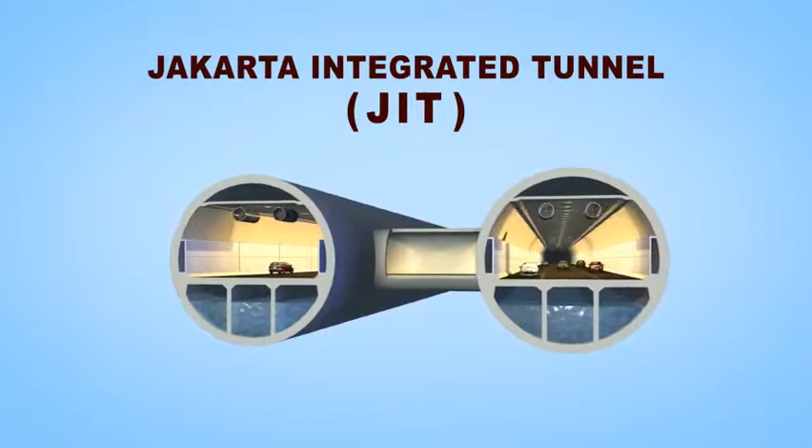Jakarta Integrated Tunnel, a twin or double-barrel tunneling system, presented by PT Antareja Mulia Jaya and supported by the Ministry of Public Works and Housing in cooperation with the provincial government of DKI Jakarta.

Jakarta is the capital city of the Republic of Indonesia with a population of around 10.2 million people in 2011. But the Jakarta metropolitan area, or Jabotabek, has around 28 million people, which is the biggest in Southeast Asia or the second biggest population in the world.

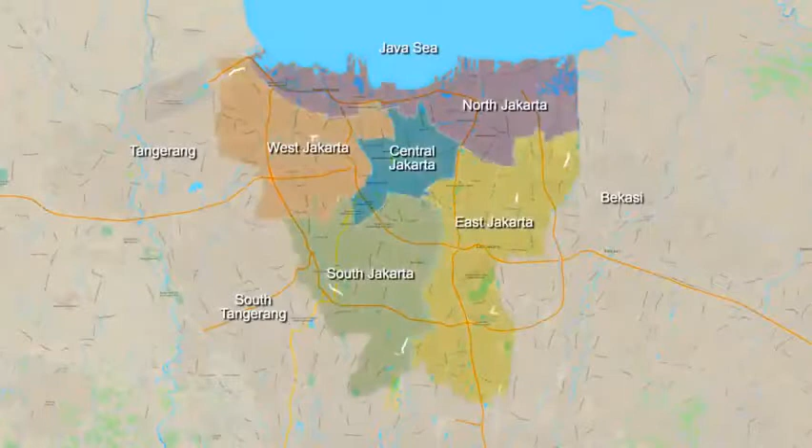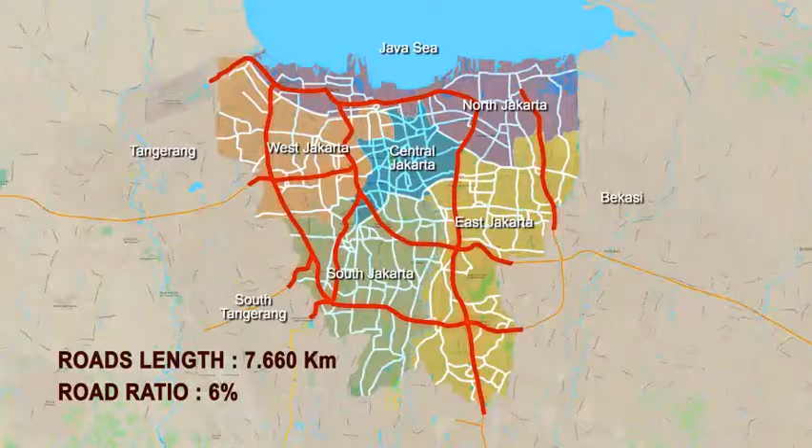Jakarta has only 7,660 kilometers length of roads, covering road areas of around 4,000 hectares. The ratio of roads in Jakarta is only around 6% of the city area. The total amount of motor vehicles in Jakarta is around 9.6 million in August 2014.

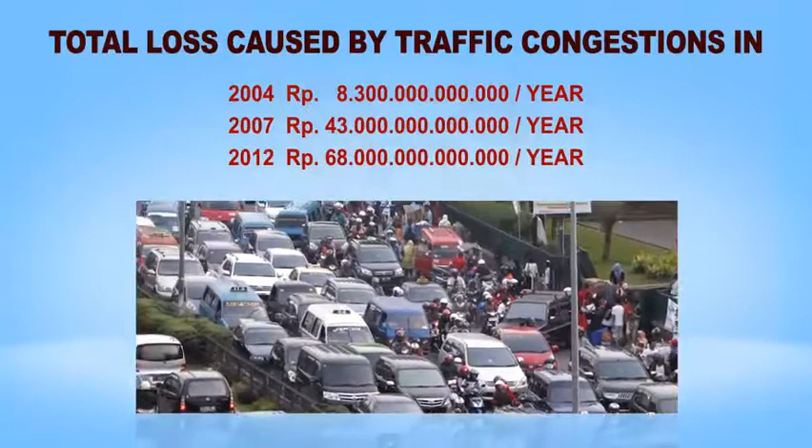These motor vehicles are always increasing rapidly year by year and cause severe traffic congestion in almost the entire city area. The classical problems of Jakarta city are traffic congestion and flooding.

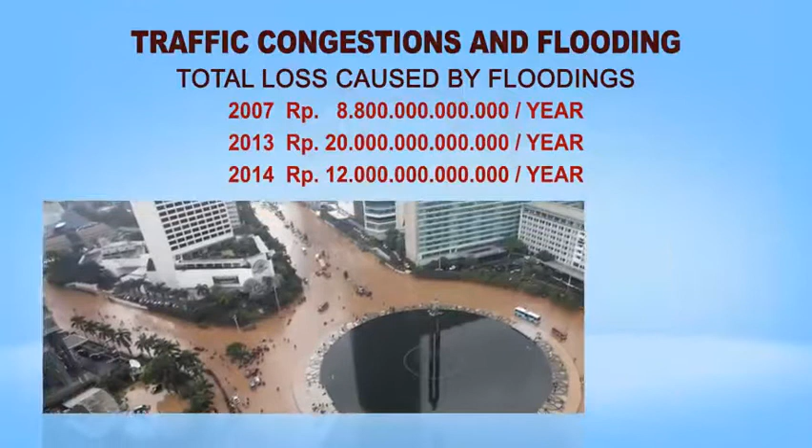The basic concept of flooding management in Jakarta was given by Professor Herman van Breen in 1918, when Jakarta was called Batavia under the Dutch colony. In this concept, Batavia city was entrenched by a flooding channel. In principle, this concept is to limit or restrict rainfall water coming to the city from the upstream area by building a half-circular flooding channel.

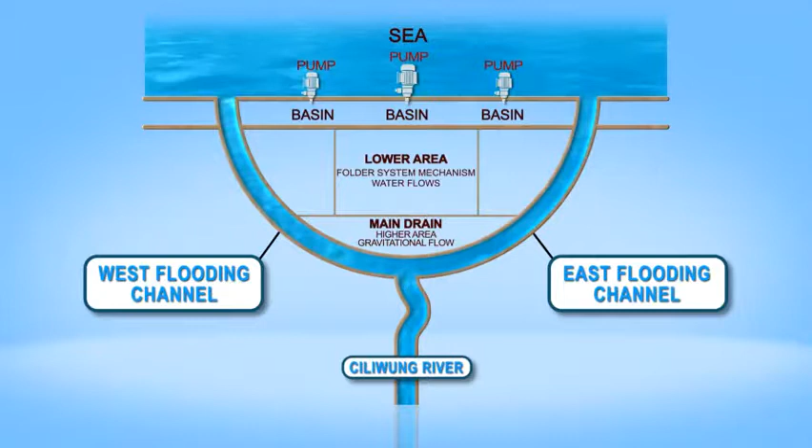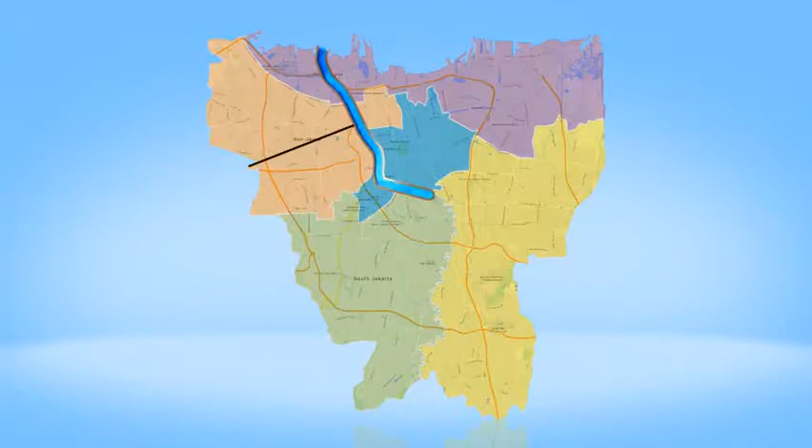Whereas since the volume of rainfall in the city has become less, it can be managed by building several drainage channels inside the city. The Dutch built half of the flooding channel to cover surface water flow from the southwest bound area of the city. This channel is well known as Kanal Banjir Barat, or West Flooding Channel.

Just a few years ago, the provincial government of DKI Jakarta completed this flooding channel by building the other half of the channel in the east direction, that is the East Flooding Channel. However, now a new problem has arisen. The old Batavia has changed and become a bigger city called Jakarta. The flooding channel is not bounding around the city anymore, but is now located in the middle of the city. Therefore, a new model of flooding mitigation is urgently needed at the south bound of this flooding channel.

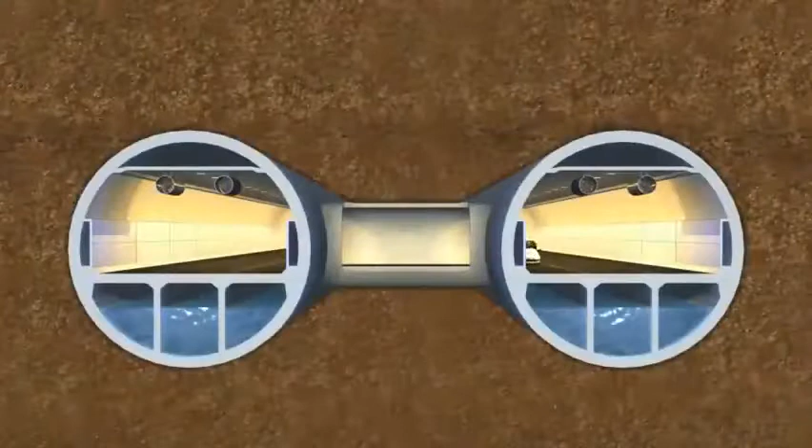The best answer to all of those problems is the Jakarta Integrated Tunnel, or JIT. JIT is a solution to traffic congestion and flooding problems, and at the same time, it can give a solution to the lack of electricity and standard clean water supplies of the city as well.

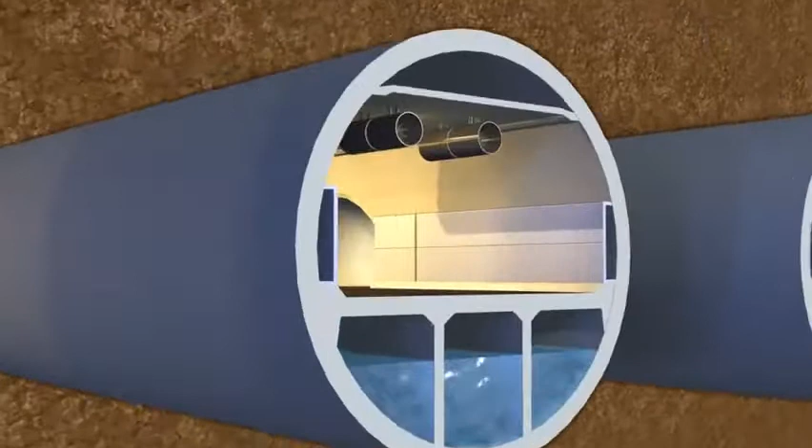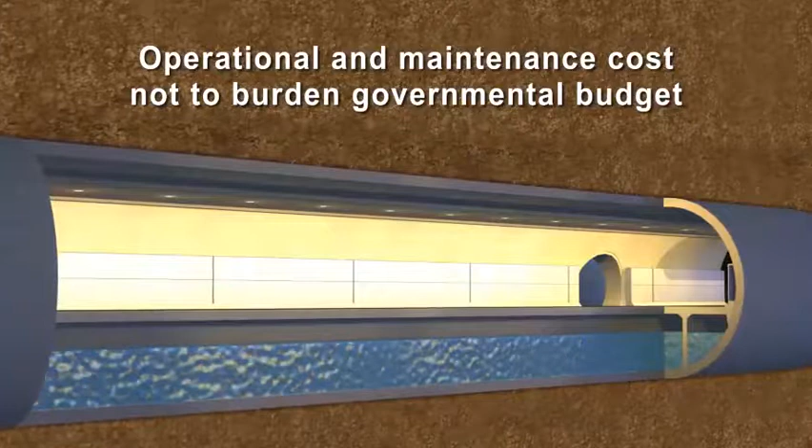Actually, it is an obligation of every government in the world to build and finance a flood controlling system facility, because not even a single private company will step into such a zero return project. In order to overcome this constraint, in the Jakarta Integrated Tunnel concept the flood controlling system is integrated into a toll road system. So the JIT system relatively will not burden the government budget, especially in operation and maintenance of the project.

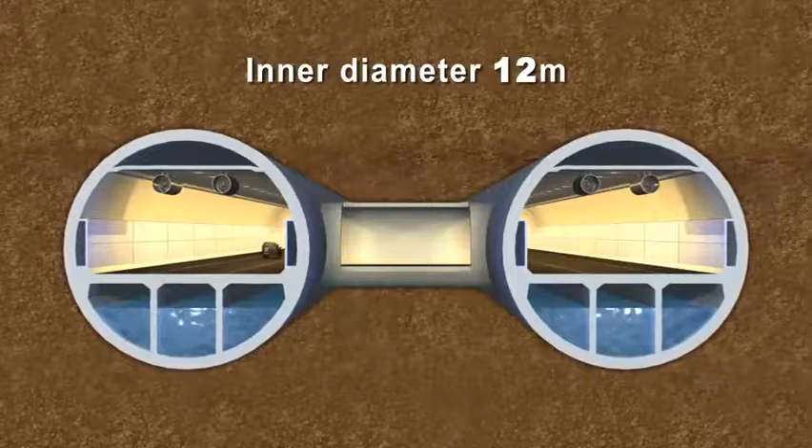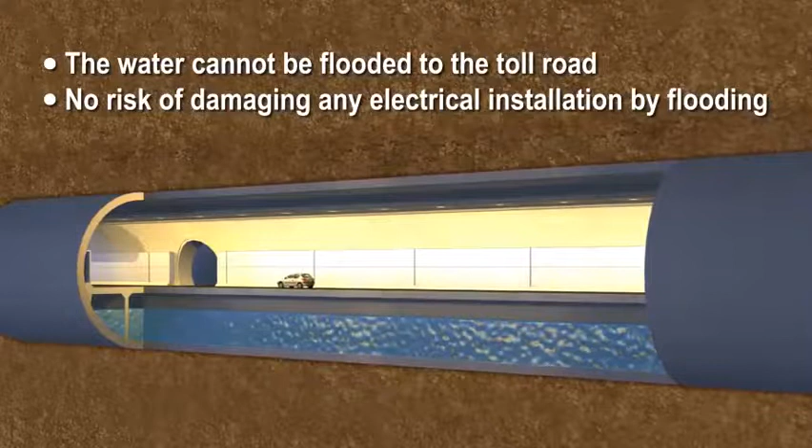The Jakarta Integrated Tunnel System is a twin tunnel or double-barrel system of 12 meters inner diameter each. There are 3 lanes of toll roads in each tunnel. In the JIT system, the functions of flood controlling and toll road are totally separated. There is no need to build a water gate inside the tunnel to separate and alternate these two functions, wet and dry conditions, as needed in the single tunnel system. Therefore, there is no risk of water flooding the toll road at all.

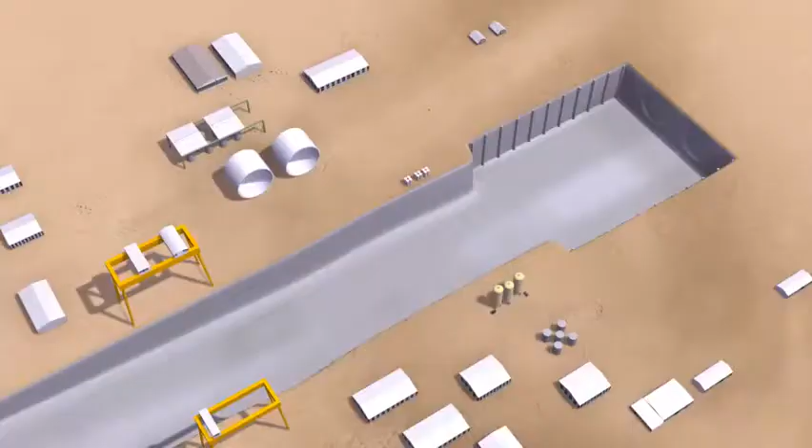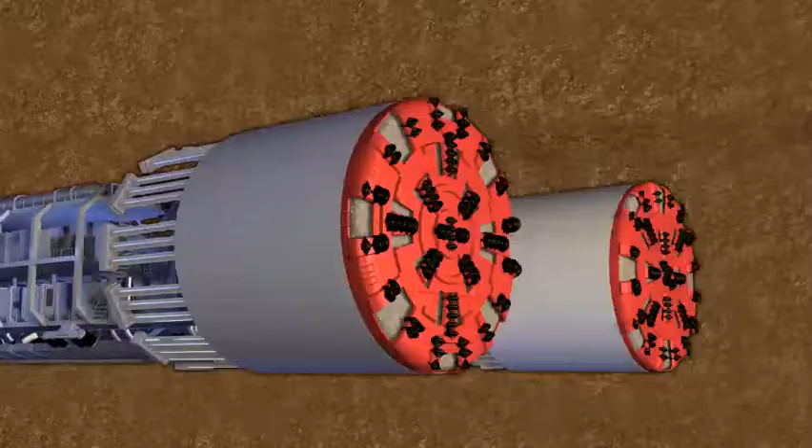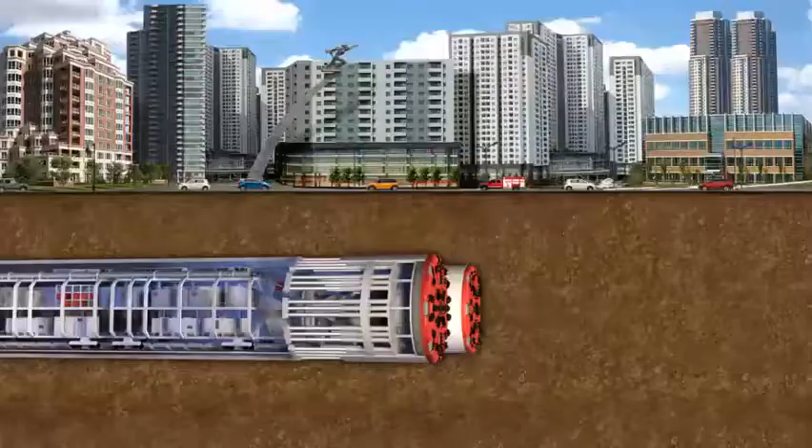Since there is no land acquisition needed, or only limited at both ends of the tunnel, tunnel construction can be done in a very fast and safe way using a tunnel boring machine, or TBM. While the machine is moving ahead, it is followed by installing precast concrete segments to form the tunnel linings or tunnel walls. The route of the Jakarta Integrated Tunnel is chosen under an existing road or under an existing railroad.

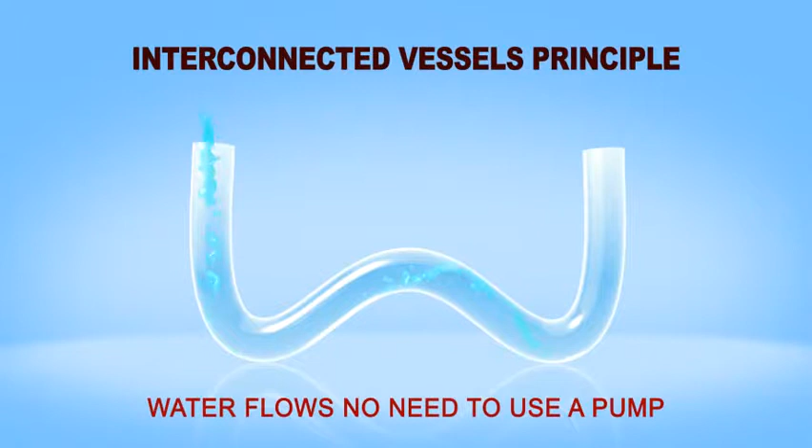By doing this, it can assure to avoid long and deep pile foundation of buildings and to get a good compact subgrade formation. During construction stage of TBM, there is no or only limited disturbance to the existing activities on the surface.

Method of works in the Jakarta Integrated Tunnel for flood controlling system is based on interconnected vessels principle. In this principle, an open vessel or water tank, when it is connected to another vessel or water tank by means of a closed tube, then the water surface level in each vessel will have the same height from a derivative point. Or in other words, it is said horizontally even.

So, if water is being poured into one vessel of an interconnected vessel, then the water will flow through the tube into another vessel until the height of the water level in both vessels becomes horizontally even. Water flow inside the tunnel is ruled by a gravitational law, and therefore, there is no need to use a pump, except for the purpose to re-empty the vessels.

Maintenance of wet area of lower channel can be done one by one alternately among each tube of the twin tunnels. When one tube is being emptied, then the other tube is still keeping on functioning in channeling water. With the continuous functioning of water channeling, the JIT system can also be utilized to build a micro hydroelectrical power system and as a water channel to cater for standard clean water supply to the city.

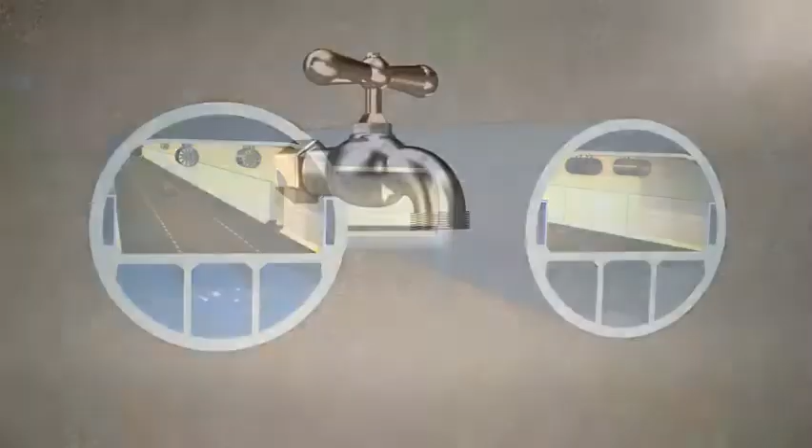At the first stage, Jakarta Integrated Tunnel will build JIT-1, Balekambang Manggarai Corridor, with a total length of 12 kilometers. This tunnel is to mitigate flooding caused by overflow of Ciliwung River and to reduce traffic congestion at southbound to city center corridor through Pasar Minggu Casablanca toll road section of 9.60 kilometers length.

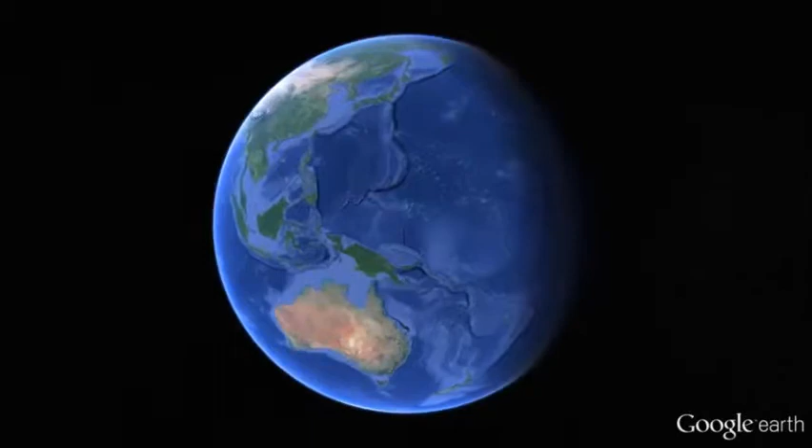This tunnel is stretched under the ground just right below the existing road, which starts from Pasar Minggu at Pasar Minggu Street and goes to Pancoran Junction, Dr. Supomo, and Dr. Saharjo Streets at Tebet area, up to the end in Manggarai at West Flooding Channel.

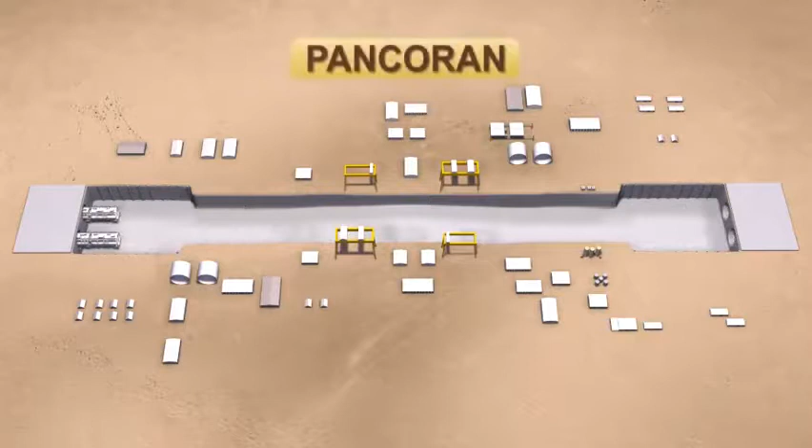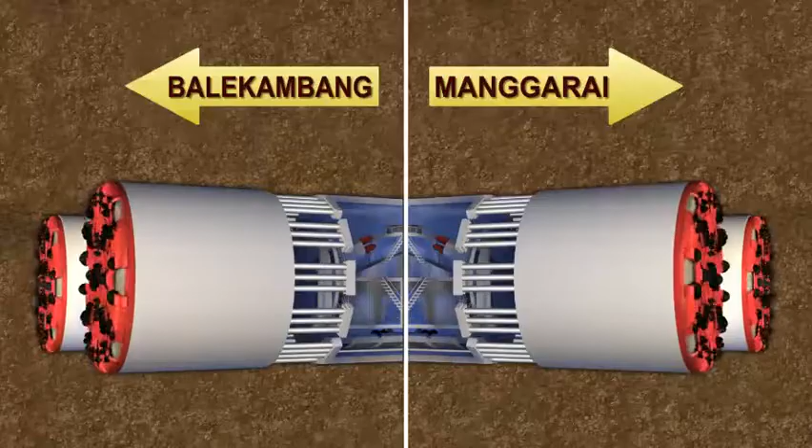In order to shorten the construction period, boring can be done in two opposite directions simultaneously. Starting from the middle of the route at Pancoran Junction, two pair sets of boring machines can do these jobs by boring two directions of Manggarai and two directions of Balekambang at the same time. Schematic Jakarta Integrated Tunnel System for Corridor of Balekambang Manggarai.

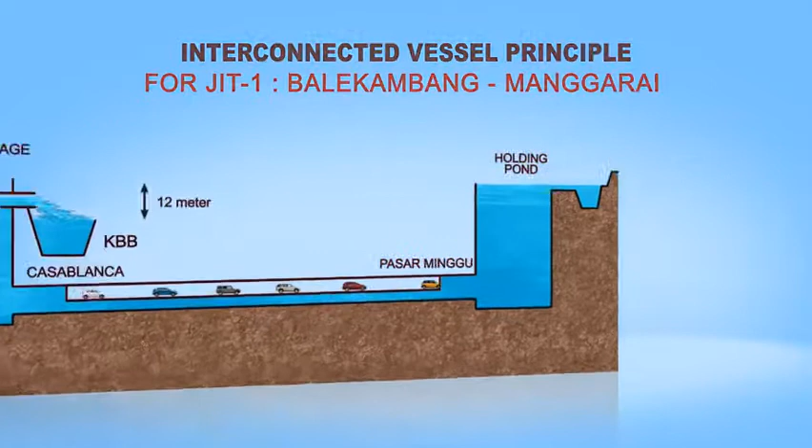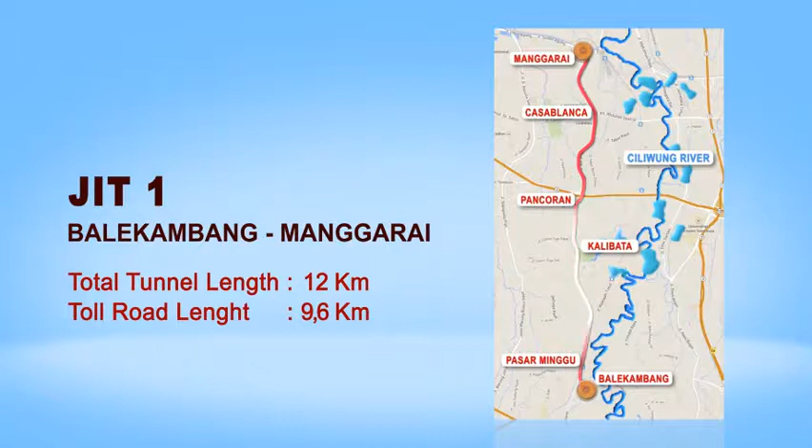After completion of construction of JIT-1 Balekambang Manggarai, the problem of flooding caused by overflow of Ciliwung River, such as at the areas of Balekambang, Kampung Pulo, Kampung Melayu, Kalibata, Bukit Duri, Otista, Dewi Sartika, and Jatinegara will be overcome.

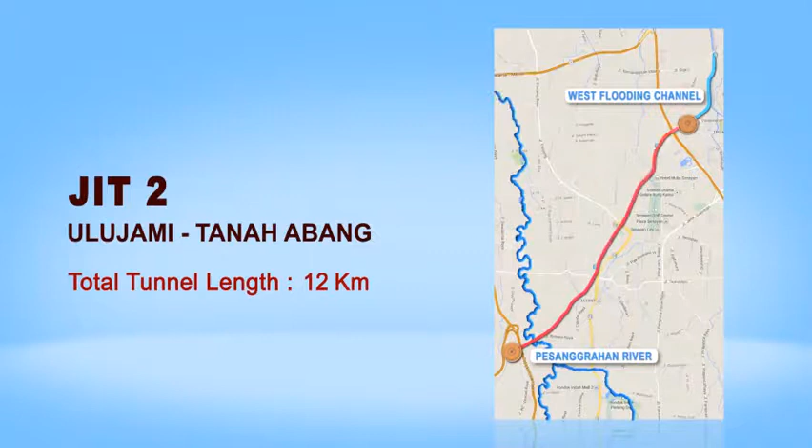Besides JIT-1 Balai Kambang Manggarai, with the same method at this first stage JIT-2 Ulujami Tanah Abang Corridor will also be built, with a total length of 12 kilometers. This tunnel is to mitigate flooding caused by overflow of Pesanggrahan River and to reduce traffic congestion at southwest to city center corridor through Ulujami Tanah Abang toll road section of 8.30 kilometers length. The 6 toll road sections in Jakarta City.

At the first stage, 2 of the 6 sections of toll roads in Jakarta City will become 2 main JIT sections. Firstly, toll road section number 6, Pasar Minggu Casablanca as JIT-1, and secondly, toll road section number 4, Ulujami Tanah Abang as JIT-2.

In the next stage, it is strongly recommended that all of these toll roads become JIT tunnels in order to complete the basic concept of flooding management in Jakarta, which has been introduced by Professor Herman van Breen, so that all other local flooding spots can also be overcome by these huge JIT drainage channels.

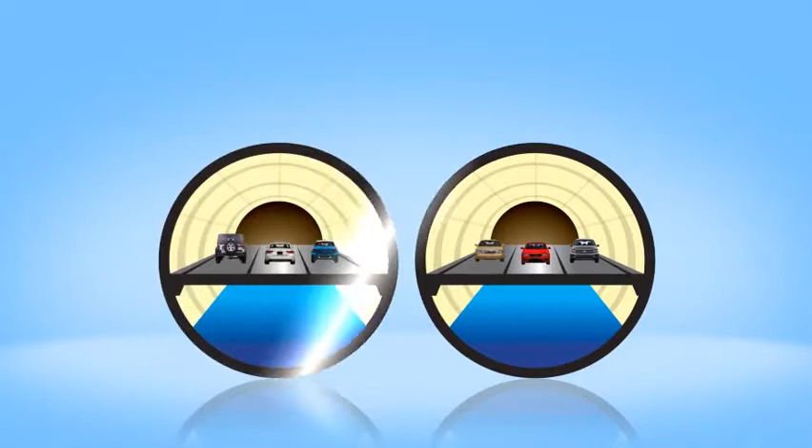The Jakarta Integrated Tunnel or JIT is a giant leap and gateway towards a better and a new Jakarta. But of course, it is not only applicable to Jakarta. It will also become a solution for all metropolitan cities all over the world. So, JIT is just in time.